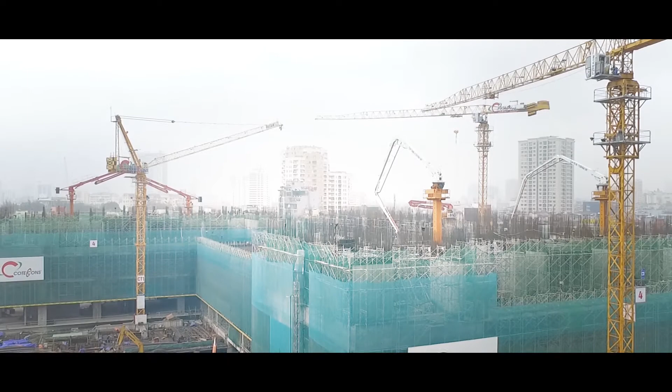Dawn is rising. The massive buildings are being hurriedly constructed. When the sun is shining, we will see the buildings reaching the blue sky like the strong rise of Vietnam. Being sustainable to last forever, Xuan Thanh Cement is accompanying various great buildings of Vietnam today.

Aiming to produce cement of international standard quality for construction with reasonable price in Vietnam, Xuan Thanh Group has pioneered selecting new state-of-the-art technologies worldwide for the construction of modern cement plants in Vietnam.

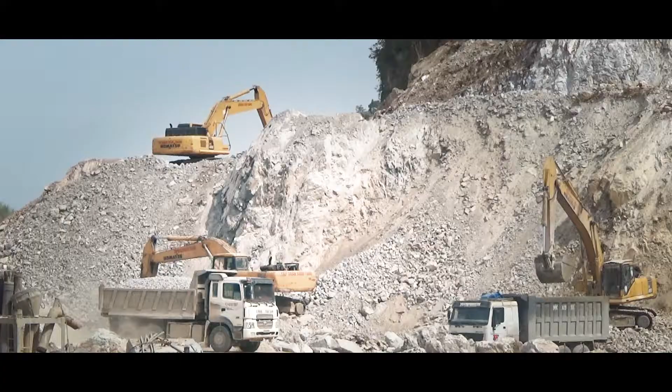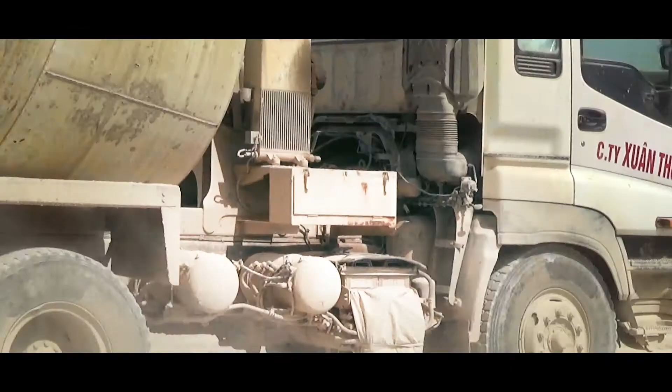One of the projects being built by Xuan Thanh is Xuan Thanh Cement Plant Phase 2, with the largest capacity worldwide of 12,500 tons of clinker per day and state-of-the-art technology and equipment. The plant is included in the Master Plan for Cement Industry Development of Vietnam for the period 2011 to 2020 and orientation towards 2030.

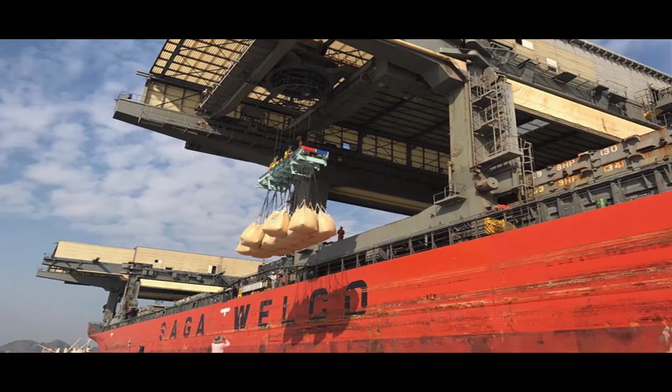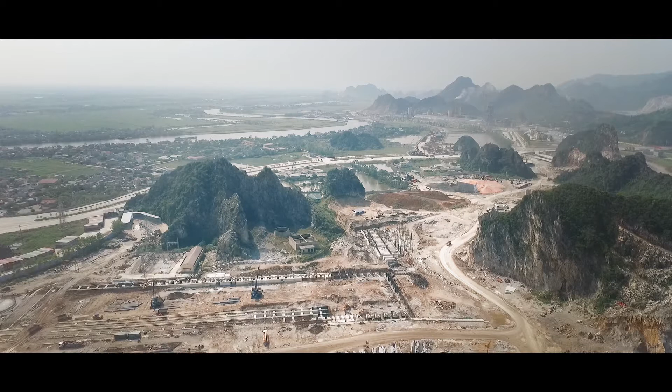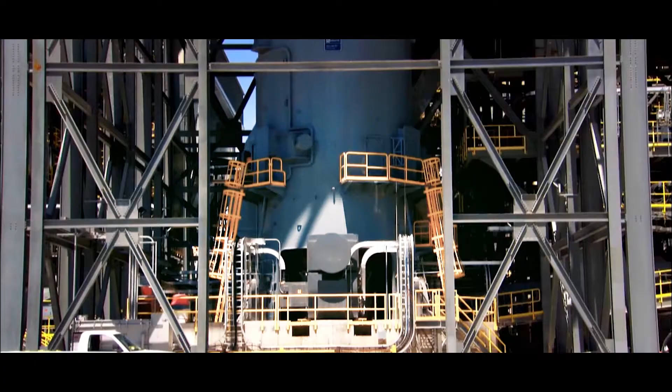How have Xuan Thanh engineers constructed such a large cement plant with state-of-the-art technology? After a period studying technology and selecting partners, Xuan Thanh Group delegated a team to survey the largest cement plants worldwide and study cement equipment suppliers.

Through survey and evaluation, Xuan Thanh Group decided to invest in a cement production project with modern technology and the largest capacity worldwide, selecting FLSmidth as the partner.

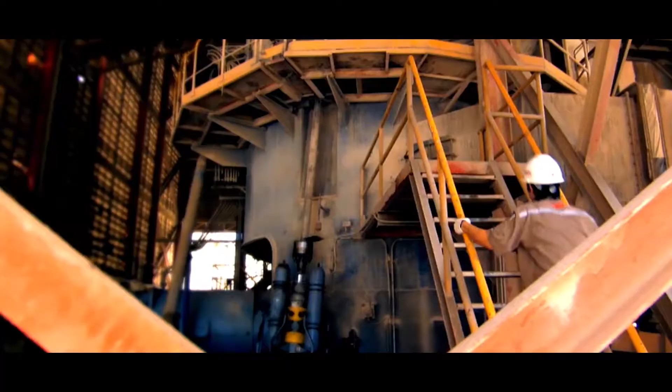FLSmidth is a leading global supplier of equipment and services for the cement and mineral industries, and it also completes the construction of such plants. FLSmidth has offices in more than 50 countries. The company has more than 130 years of experience and more than 15,000 employees around the world. FLSmidth built the Holcim cement plant in St. Genevieve, Missouri, United States, with a capacity of 12,000 tons of clinker a day. It was the world's largest cement plant at that time.

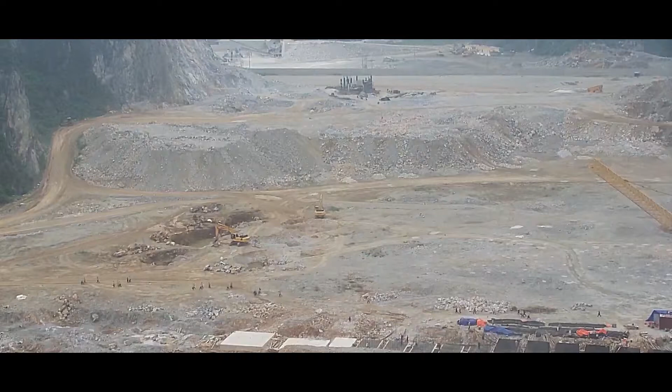On May 23, 2015, Xuan Group and FLSmidth signed a contract with a value of more than 10 trillion Vietnam dong to build a complete cement plant. Simultaneously, Xuan Group has signed contracts with 4 banks of Vietnam for this project construction. Xuan Cement Plant Phase 2 is 60 kilometers away from Hanoi. This will be the world's largest cement plant to be constructed in Vietnam.

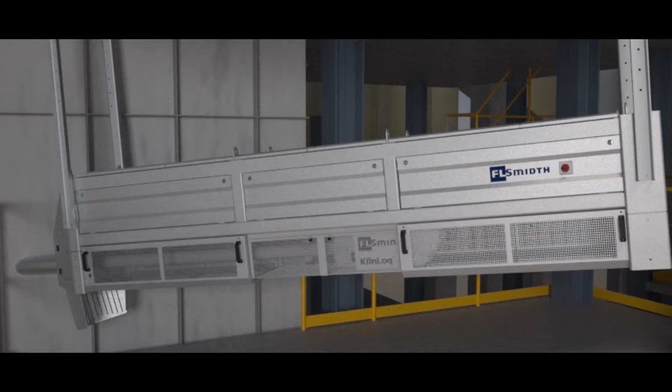The production line will include energy-saving equipment, emission control system, and the most advanced control system. FLSmidth is very pleased to participate in the construction of this, one of the biggest plants in the world, with Xuan.

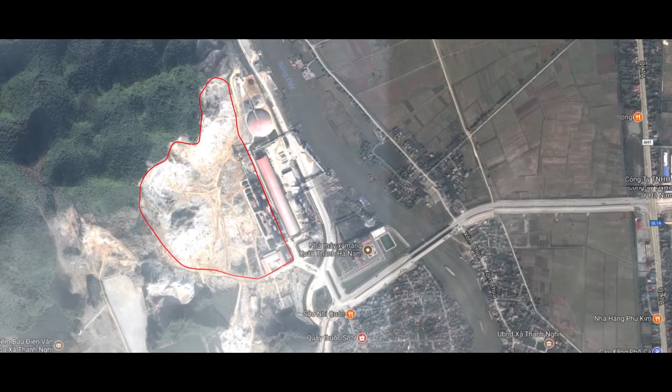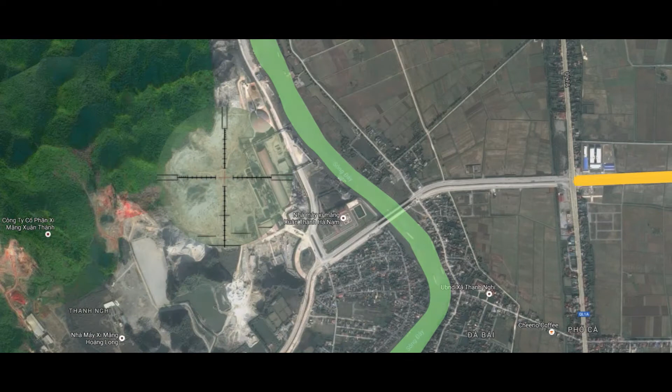Xuan Cement Project Phase 2 is in an ideal location. Here, there is an existing cement production line of Xuan producing cement with daily consumption of 8,000 to 9,000 tons for the market. Next to this plant group is Day River, 240 kilometers in length, flowing through many provinces to Tonkin Gulf and Kim Son, Ninh Binh. The downstream of the river flowing through Hà Nam is considered a national river route.

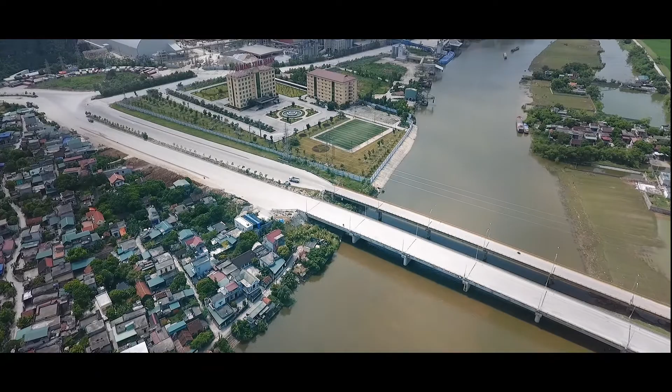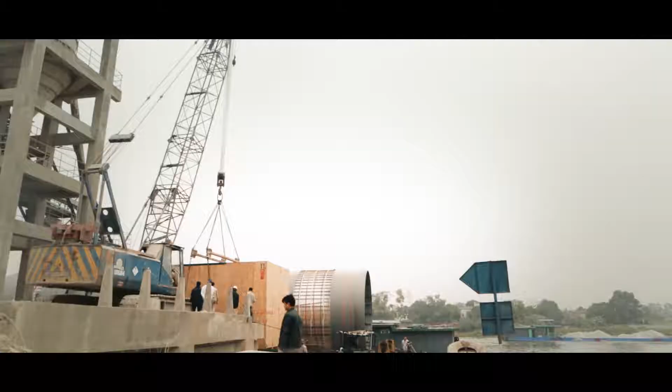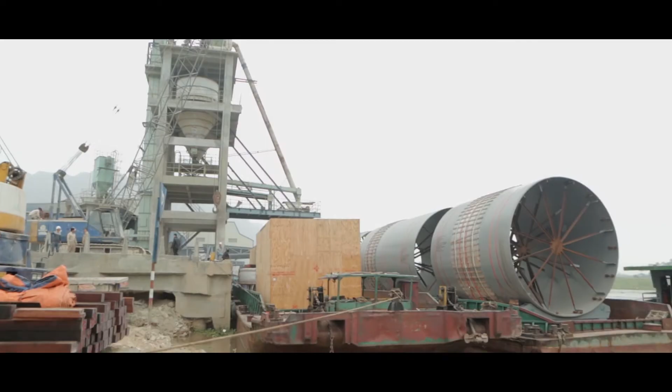Here, Xuan has invested in a jetty complex to intake raw materials as well as dispatch output products when the plant is in operation. Equipment assembled in other workshops and ordered overseas has been transported to deep ports of Vietnam by large vessels and then to the jetty of Xuan cement plant by large barges along Day River.

A 2-lane wide road and a bridge crossing Day River were built to connect the highway and National Highway 1A of Vietnam, creating a very convenient road route for the plant to achieve economic efficiency in transporting equipment for construction, materials and finished products in the future.

Materials for cement production is the most important part of constructing a cement plant because it is directly related to quality and the price of products. According to a survey by authorities, the total limestone reserve in Hà Nam is about 7.4 billion cubic meters, of which cement limestone accounts for about 4.1 billion.

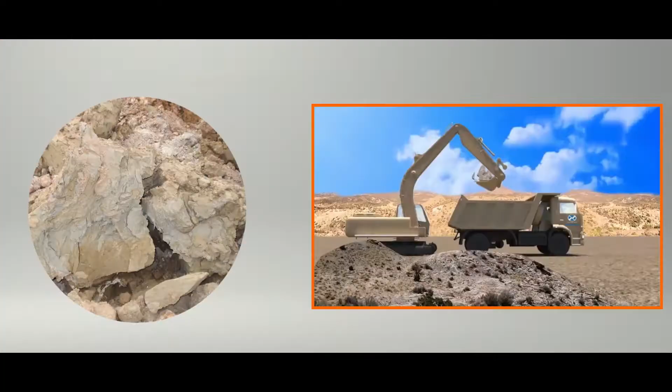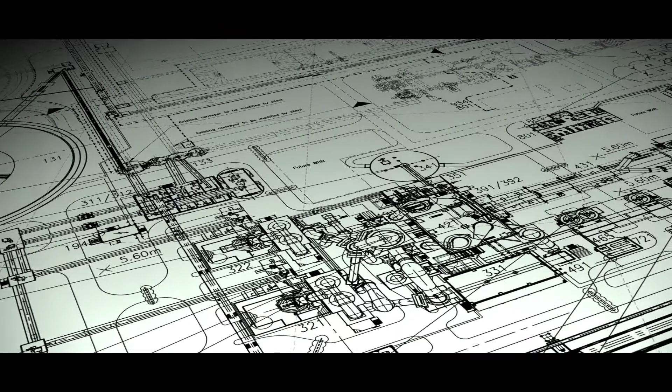This is the world's largest cement plant project with a capacity larger than the plant built by FLSmidth previously in the United States. Highly qualified project managers of FLSmidth have joined in the project from a very early stage, working continuously and closely with Xuan engineers with detailed plans from the beginning of implementation of the project.

The request from Xuan Group is that FLSmidth shall supply the latest technology, along with innovative and appropriate solutions to ensure safety of the surrounding environment during construction and operation of the plant. After dozens of site surveys and calculating constructions and appropriate technology for safety of the environment, FLSmidth and Xuan agreed on the most optimal construction plan, as well as contingency plans and criteria for continuous evaluation during construction.

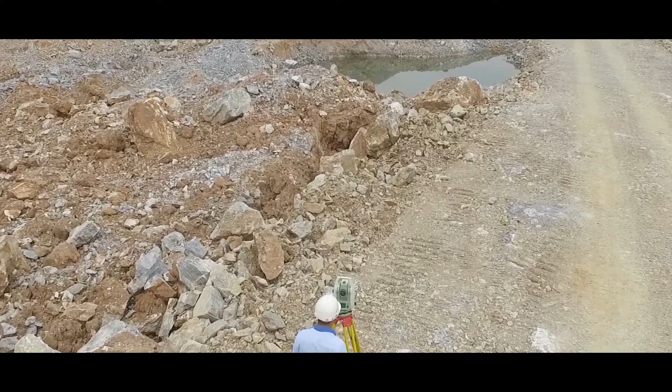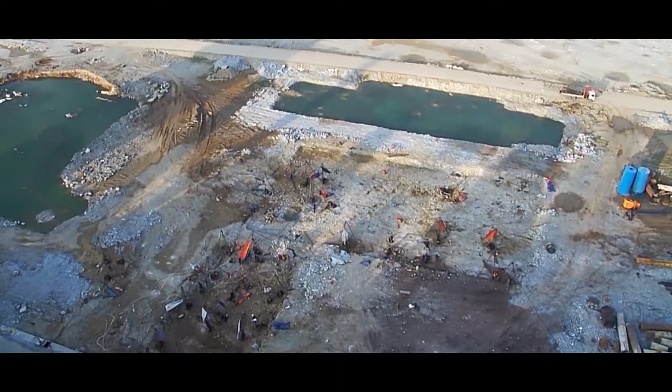Measuring and survey are an important part of construction, especially a construction with various large equipment and civil system with complex structure. Total length of probe drilling of all phases from pre-feasibility and site investigation to detailed drilling is over 60,000 meters with more than 4,000 geophysical measurement points with minimum depth of 40 meters.

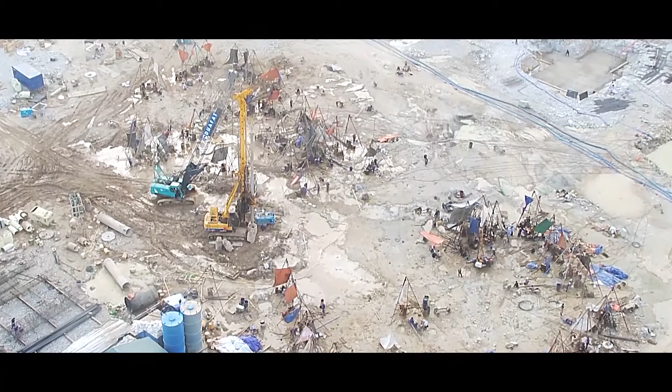Surveying work has been implemented continuously since investigation stage and during construction. Surveying parameters have been updated and processed on computer and updated to technical drawings implemented by one team of Xuan engineers to ensure the correct geometry and design positions of building items.

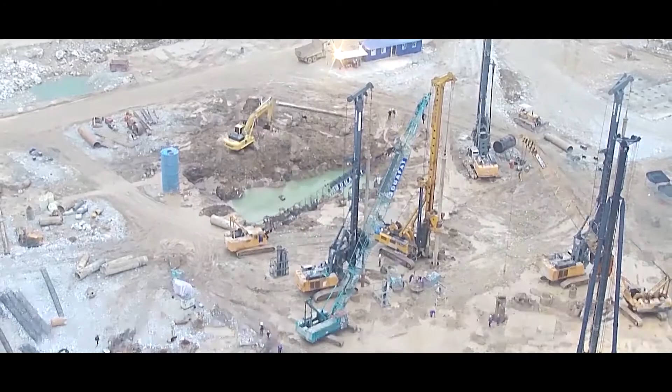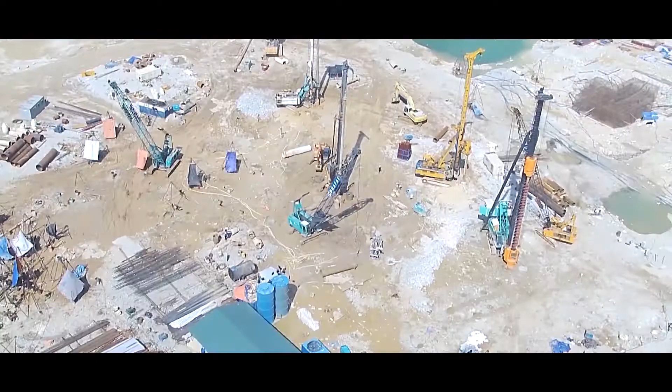Based on geophysical measurement data, the engineers calculated the executed bored piles under construction conditions of solid rock and karst cave. Bored piles are reinforced and sprayed with concrete by new technology. The construction has taken place in daytime and nighttime to create 1,474 bored piles with the largest diameter of up to 1,200 millimeters. The bored pile system has been calculated to create a solid and stable foundation for construction system and overweight items to be installed.

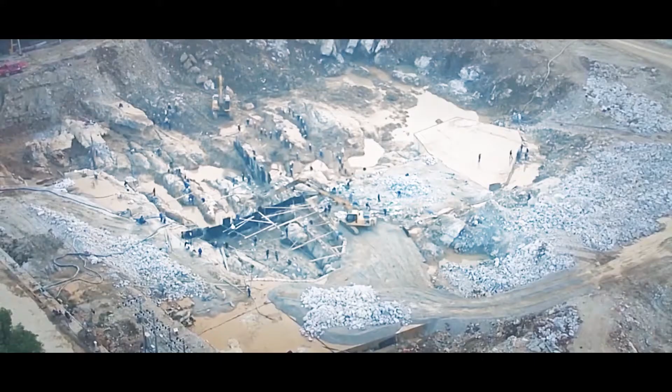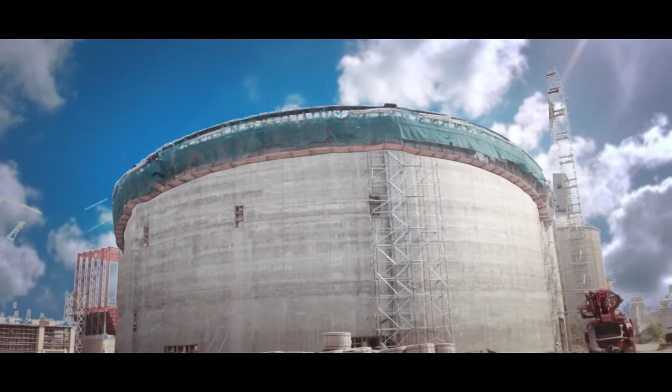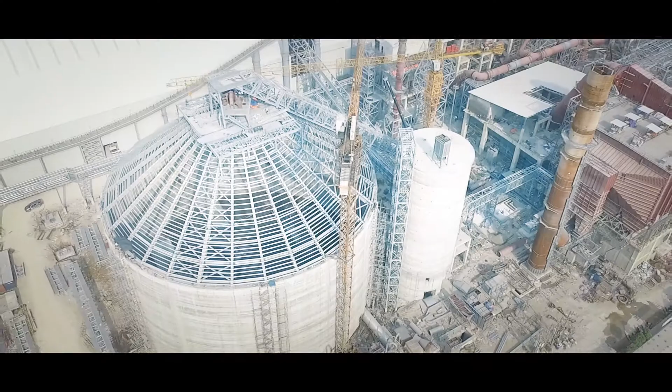All silos of the project were built using slip form concrete technology. This technology created integrity of structure and no casting joints. It helped accelerate construction progress and finish fresh concrete surface with high quality. Silos of the plant were completed earlier than scheduled, thanks to advanced technology and continuously and timely provided concrete from our neighbours' plants.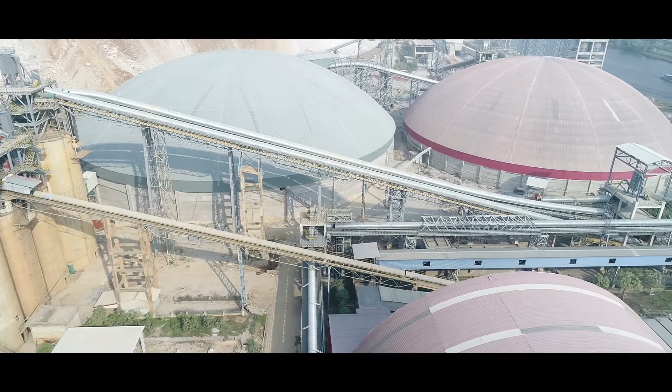To ensure the best quality of clinker for producing cement and exporting to international market, the plant has invested in constructing 3 clinker silos with capacity of over 300,000 tons. Clinker and cement are exported to the plant's port by automatic conveyor system with capacity of 1,000 tons per hour.

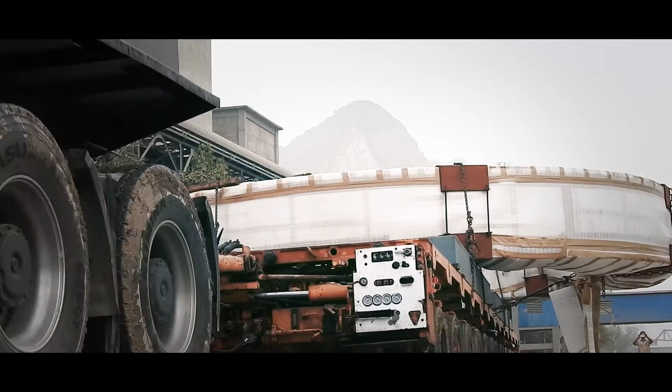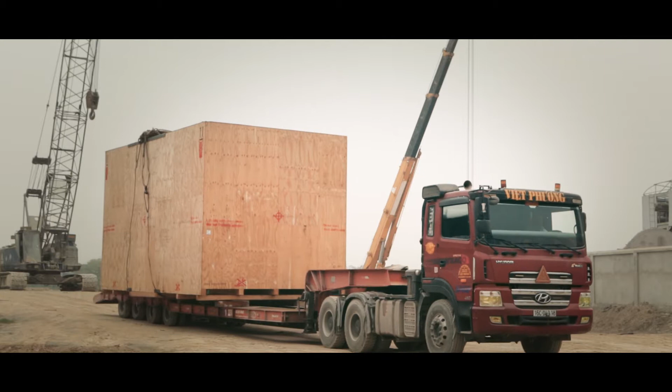The project has many oversized and overweight equipment, so transportation by road has partially satisfied the demand for transportation of equipment with size and weight in accordance with road standards of Vietnam. Therefore, transportation by sea has been used at maximum level to transport these equipments. The use of the river jetty requires calculation of tide for unloading equipment from ships in the port.

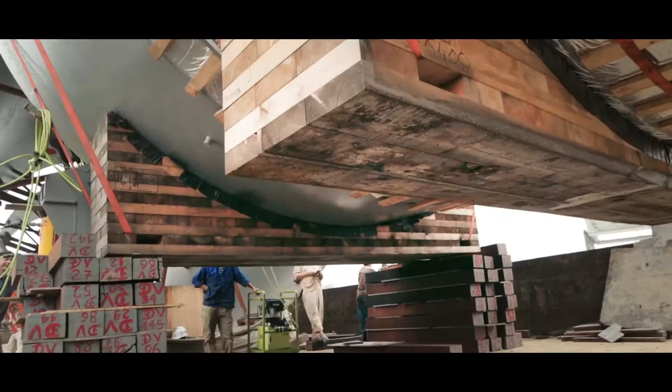Xuan engineers have been always ready, regardless of day or night, to choose the right time for unloading oversized and overweight equipment and transport them to the construction site. Sometimes it is not possible to use crane unloading equipment from barge onto trucks to transport to warehouse or pre-assembly sites because of limited space of jetty. Therefore, each barge arrival would be a meticulous work taking many days and nights.

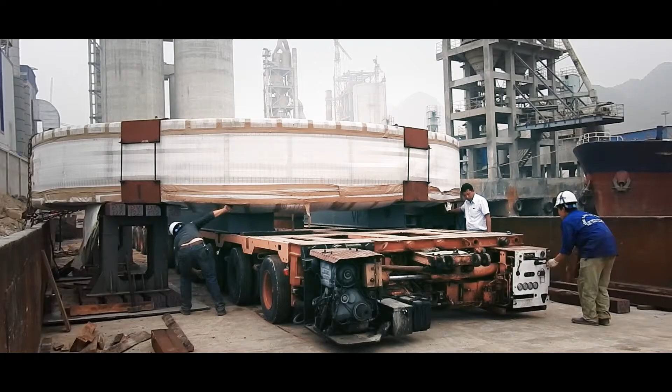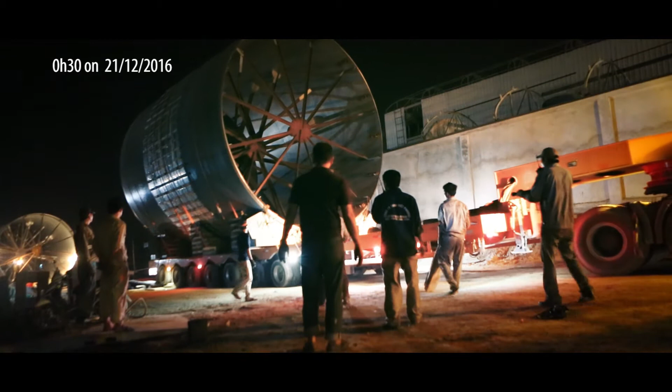A steel bridge was transited from the riverbank to barge at right tide, allowing a specialized vehicle to go onto the barge. Hydraulic jacks with hundreds of tons capacity were arranged together scientifically to lift equipment onto the vehicle. Moving by every millimeter, the vehicle would bring over 200 tons of equipment up to the riverbank and then to the warehouse.

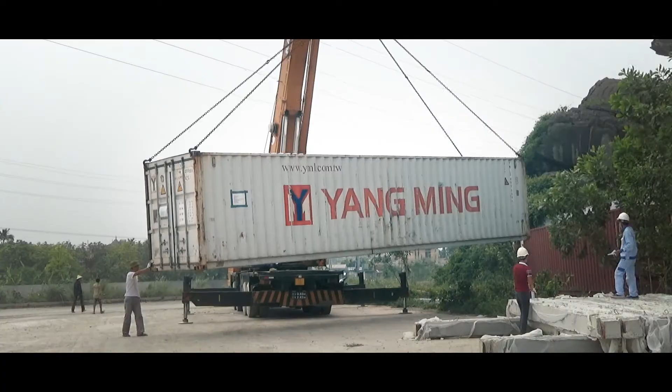FLSmidth specialists have always been available on site to give assistance and guidance during installation. Xuan site team have been responsible for planning as well as monitoring quality of site work conducted by dozens of different contractors. In order to avoid unexpected events during installation at the construction site due to the failure in supplying of any details, FLSmidth and Xuan together carefully inspected goods after receipt and prepared all facilities and manpower several months before installation.

Time schedules and updated erection sequences made by installation contractors have been submitted to Xuan. Besides, FLSmidth and Xuan actively conducted inspection before erection. Thus, it helped save time by avoiding any last-minute unexpected events by resolving all problems before installation.

The most important factor in construction activities is high concentration on safety issues. Xuan and FLSmidth have had good preparation to ensure safety for people and equipment. As you can see here, we are building a big factory and we have to deal with big equipment, so safety is our first priority.

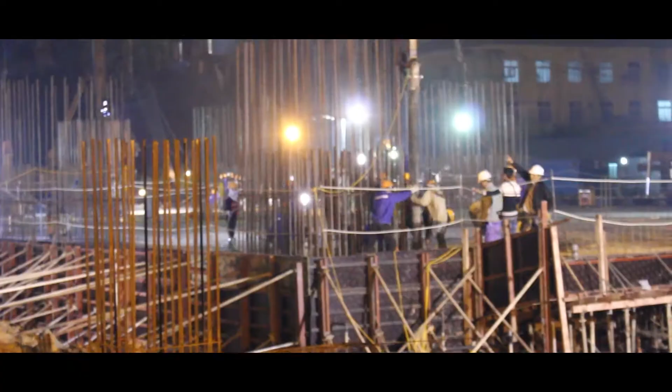Senior leaders of Xuan Group have always been present at the construction site to grasp and follow up all construction stages, especially in important periods. The board chairman of the group was present at night to encourage all officers, engineers and workers working at the site. It was a powerful source of motivation for work to be performed accurately, effectively, with excitement and enthusiasm.

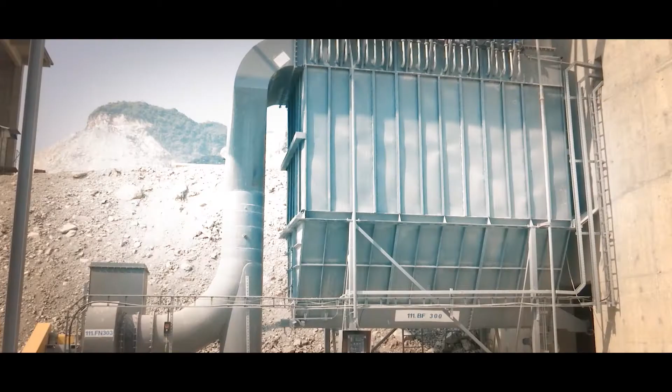The system of limestone crushing plant, argillaceous rock crushing plant and additive are constructed and installed according to the most advanced technology of FLS with the complete capacity of 3,200 tons per hour. From this crushing plant system, material will be collected and sent to storage by automatic conveyor system.

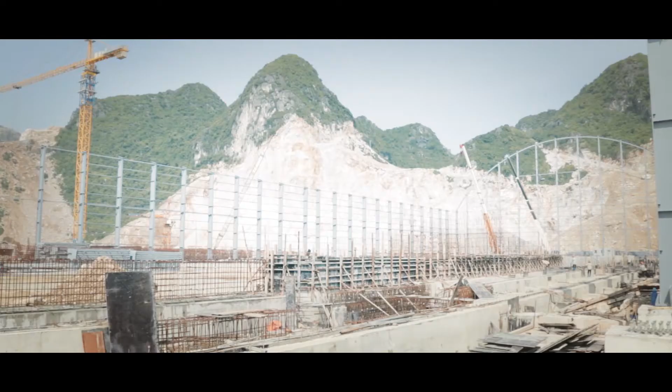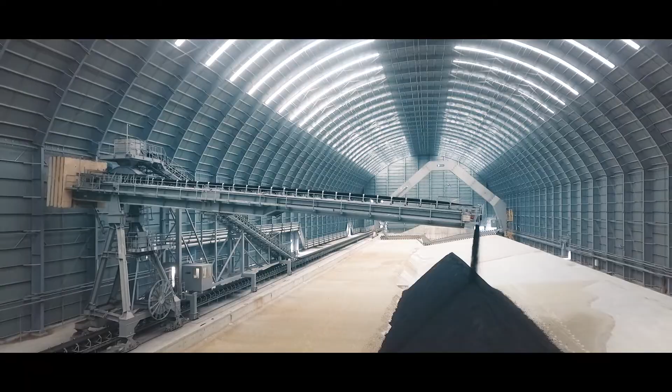Storages of raw materials with the area of nearly 50,000 square meters. The United States standard was applied for design and they were constructed with prefabricated steel frames and perpendicular structures. The construction of storages with pre-engineered steel frames was of high accuracy, uniformity and stability. The feeding system, hydraulics, travelling system of reclaimer inside storage are modern equipment with the latest technologies designed for large capacity, satisfying the plant capacity.

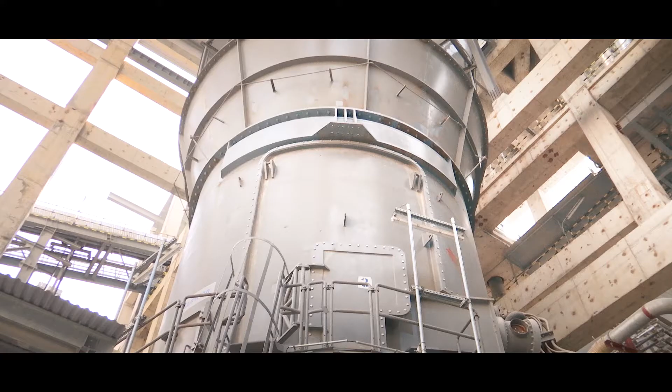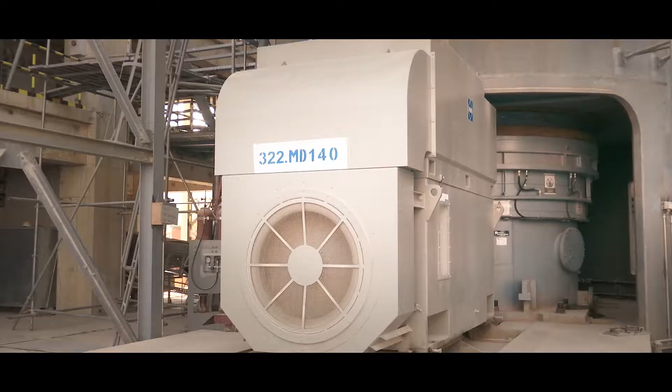2 material grinding machines, ATOX 50, with a capacity of 1,000 tons per hour, have been installed to ensure providing adequate material for the heating furnace system with capacity of 12,500 tons of clinker per day, and could meet up to 15,000 tons of clinker per day. Smooth material powder will be transported through an air slide system into the silo containing material powder.

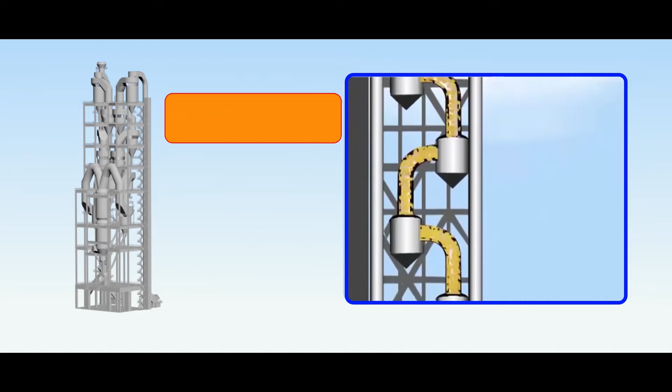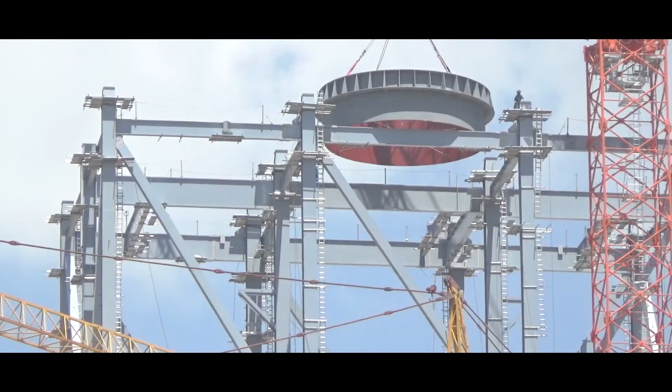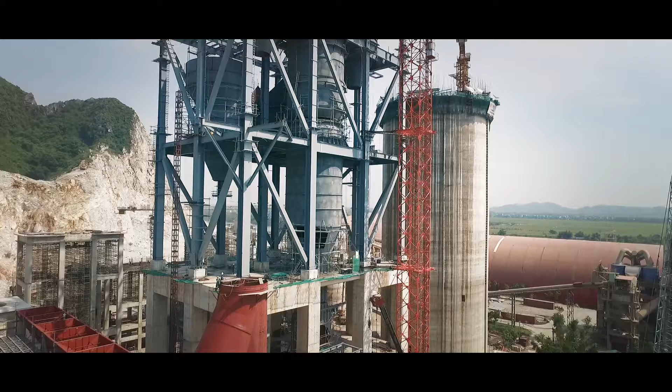The plant has a 4-string, 5-stage preheater, ILC calciner with 3-pier kiln and MMC cooler. The preheater was made of steel structure and consisted of large components manufactured abroad and transported to the construction site, as mentioned at the beginning of the film. Huge cranes were mobilized for installation of the preheater under strict supervision by FLSmidth engineers and Xuan supervisor team.

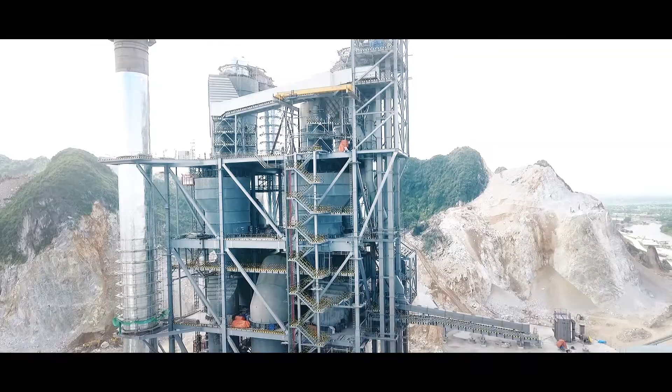This is the preheater with the most modern technology worldwide, designed by FLSmidth. The preheater has high efficiency, stable operation and is energy saving. Heat from preheater and kiln shall be recovered for the purpose of generating power of 24,800 kilowatts. This will be conducted by Anhui Conch Kawasaki Engineering Company Limited, which has signed a contract with Xuan Thanh.

Waste heat recovery power to be used for production will save 30% of energy for the plant, reducing national grid load. It will contribute by reducing production input cost, reducing product price, and enhancing brand value, thanks to environmental production contribution by greenhouse gas emission reduction.

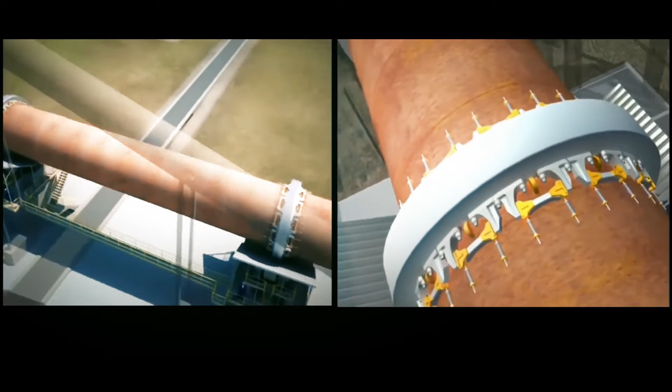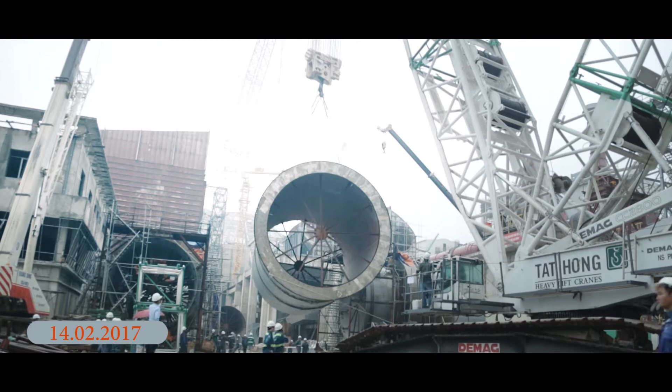The burning process taking place in the kiln always plays a specially important role in product formation. Xuan Thanh clinker kiln has an inner diameter of 6.3 meters and a length of 97.7 meters, designed capacity of 12,500 tons of clinker per day, with possible actual capacity of 15,000 tons of clinker per day.

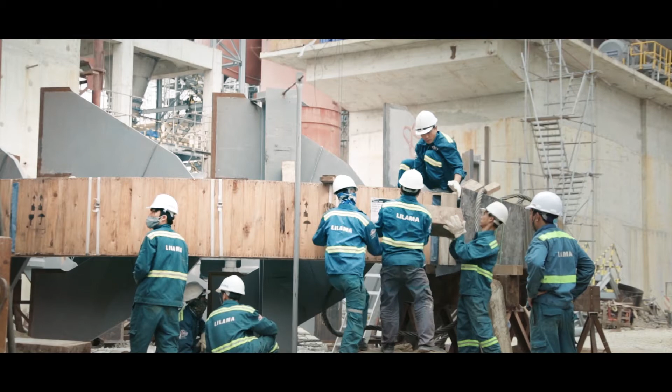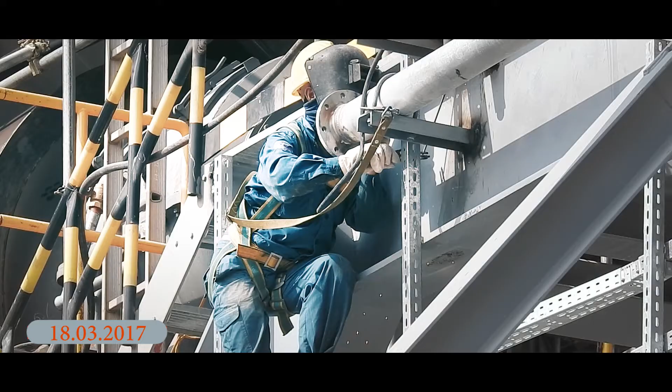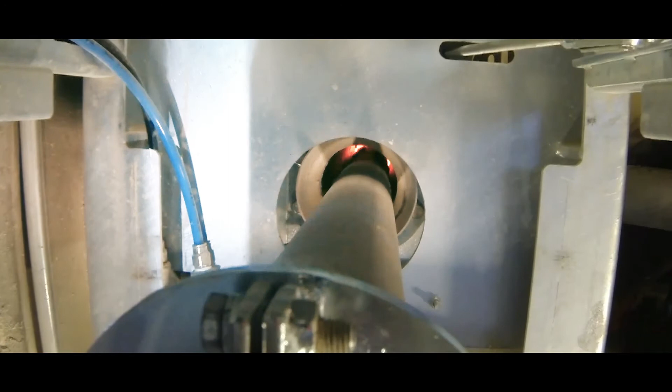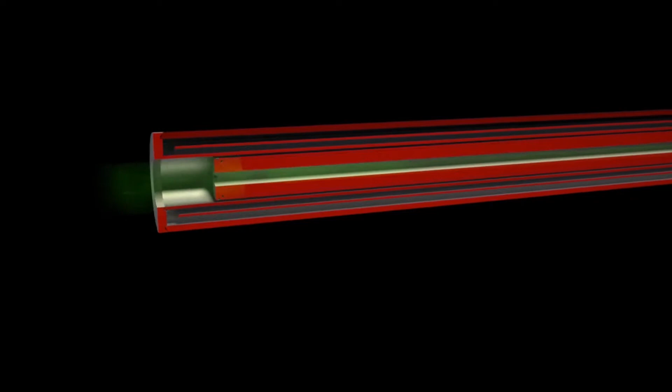The kiln has a weight of 1,900 tons, using FLSmidth's most advanced technology to effectively control emissions of NOx, SO2, CO, and volatile organic compounds. The design for the kiln lock system of gas analyzer at kiln inlet and calciner by FLSmidth is simple, reliable, and granted patents around the world. Kiln lock helps improve kiln efficiency and energy conservation. This design allows easy maintenance and cleaning of the probe.

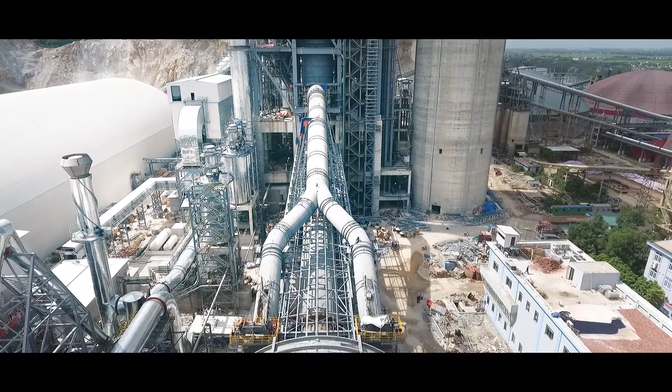Supporting rollers were integrated with the kiln shell. The biggest, of 320 tons, was installed at 24 meters height. To install such a roller, a crane with lifting capacity of 600 tons was used. On April 5th, 2017, the last kiln block with a 250-ton kiln tire was installed in its place, completing mechanical installation for the clinker kiln section, ensuring safety, quality and efficiency, and ahead of schedule.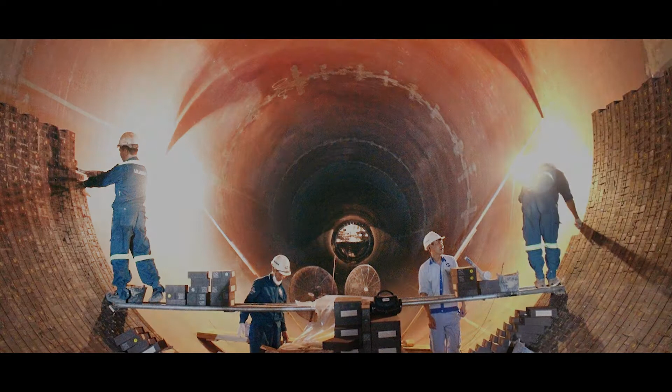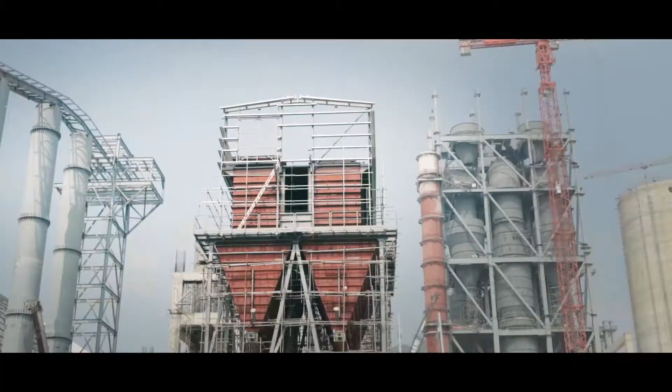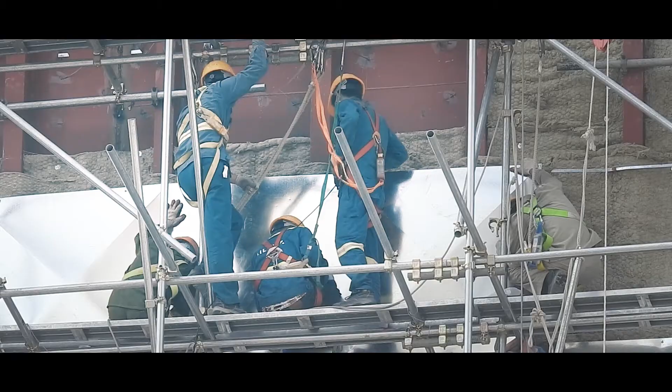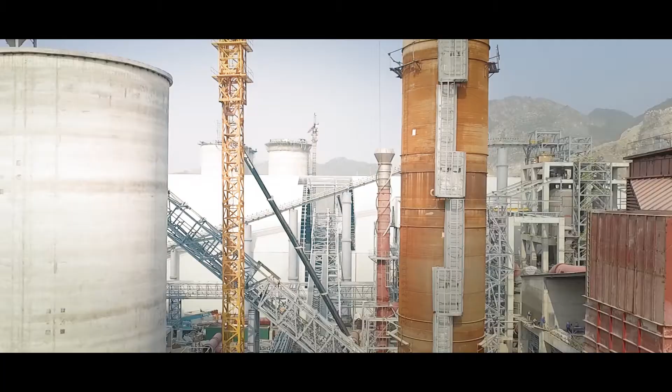This advanced electrostatic precipitator system is one of the most important items of the plant, implemented under the strict supervision of Xuan engineers. Big size filter is FLSmidth's new technology. Thus, it can be said that Xuan Cement Line 2 project will be a standard project in terms of exhaust emission to the environment.

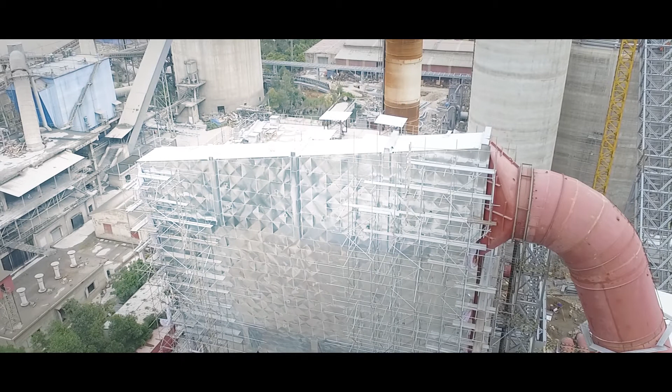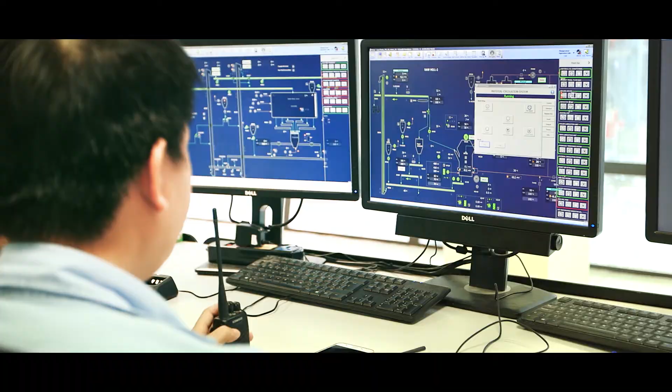The modern distributed control system, DCS, automatically controlling and monitoring the whole plant production process, has been supplied by Siemens of the Federal Republic of Germany. It is DCS that enables operators to control the production process quickly and accurately, resulting in stable and high-quality products.

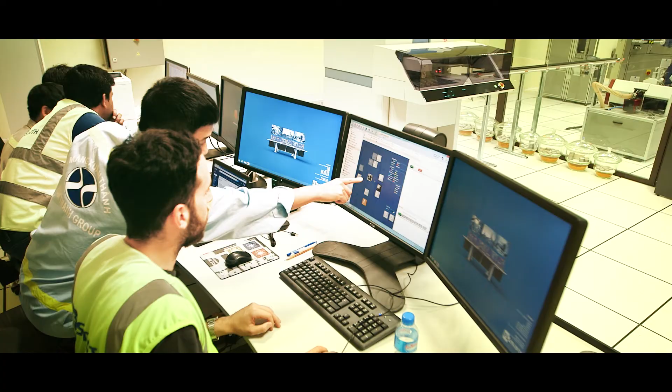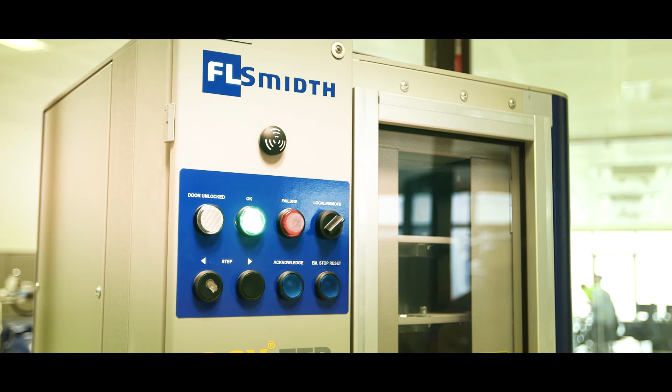The raw mix material system is controlled online from the product quality control room via X-ray system, the most advanced and newest one. In addition, the QCS system connecting to dosing stations through DCS helps enhance and stabilize product quality. Laboratory equipment of European standard, including an X-ray analyzer originated from Switzerland, shall analyze input materials and monitor product quality quickly and accurately.

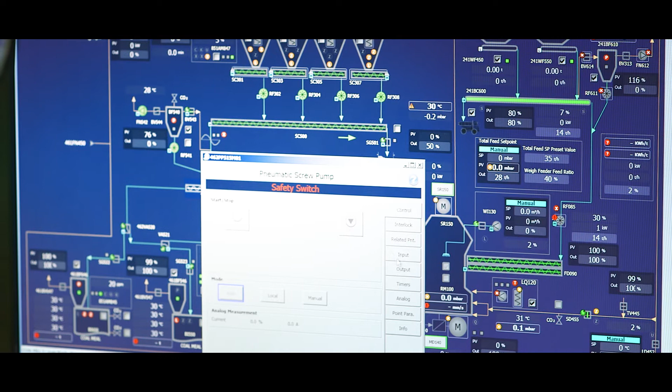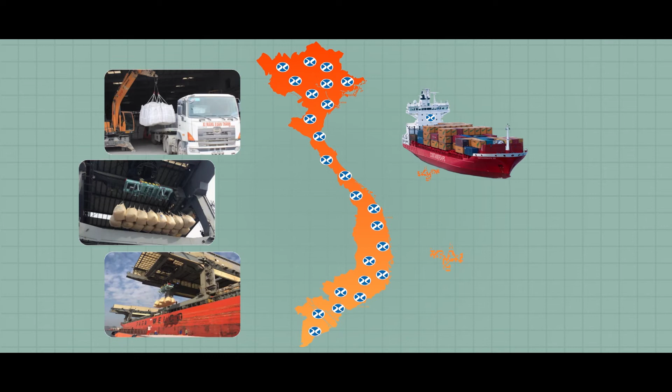By controlling finished products in each section, Xuan Thanh has brought the best quality products to customers. The completed plant has increased the capacity of Xuan Thanh Cement in Ha Nam to 5.5 million tons of cement per year, to be supplied for the nationwide market and exported to many countries worldwide.

Project execution time schedule was targeted within 24 months, but with our potential and strength and great support and assistance from the central to local authorities, especially leaders of departments of Ha Nam province, within only 22 months, all staff, engineers and employees have worked hard day and night so that the plant was completed, ensuring technique, quality and safety for people and machinery 2 months earlier than scheduled.

During the construction, there have been many great historical marks of employees. On behalf of Xuan Thanh Group, we would like to express our sincere thanks to the leaders of the Communist Party, state, ministries, cities and provinces all over the country, especially Ninh Binh and Ha Nam provinces, all credit institutions, and partners who have trusted, supported and accompanied the group to achieve such good results today.

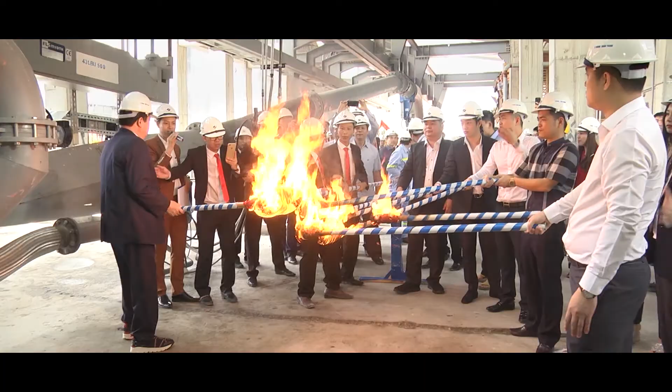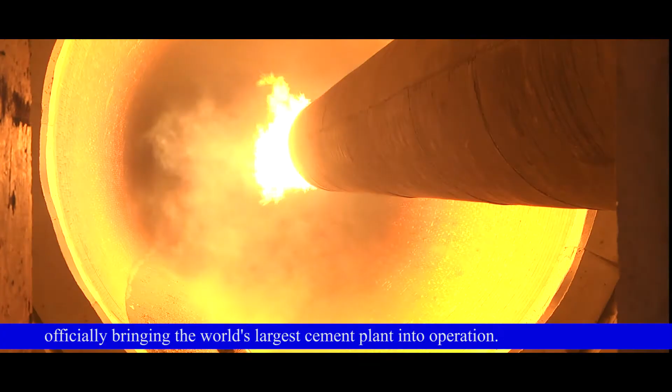At 9:10 on October 1st, 2017, the mutual kiln firing ceremony of the 2 cement plants of Xuan Thanh, Ha Nam was started by the chairman and vice chairman by pressing the startup button of the kiln and burning torches for the kiln firing, before the presence of many senior leaders from central to local levels, the top experts of FLSmidth, contractors and all employees.